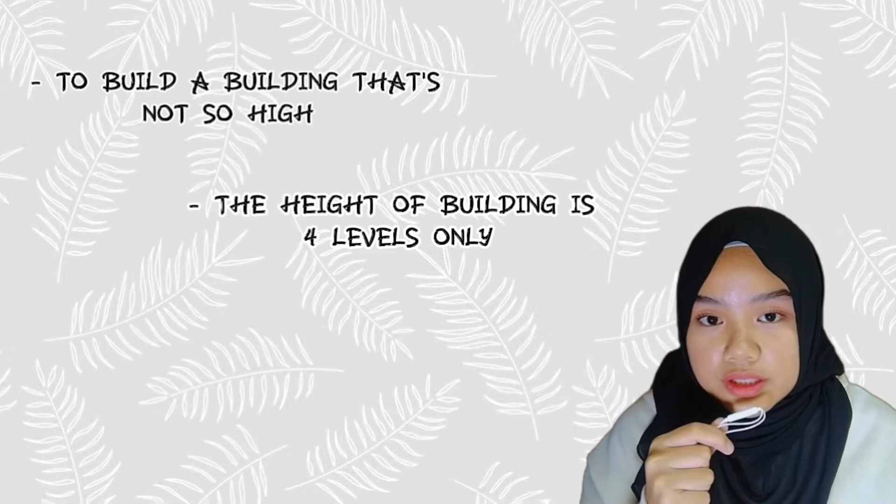Next, we're going to talk about design proposal. For the construction of these quarters, we also planned to build a building that is not so high. The height of the building to be built is only a maximum of 4 levels. The benefit of building these 4 levels is that it can prevent it from falling easily during an earthquake.

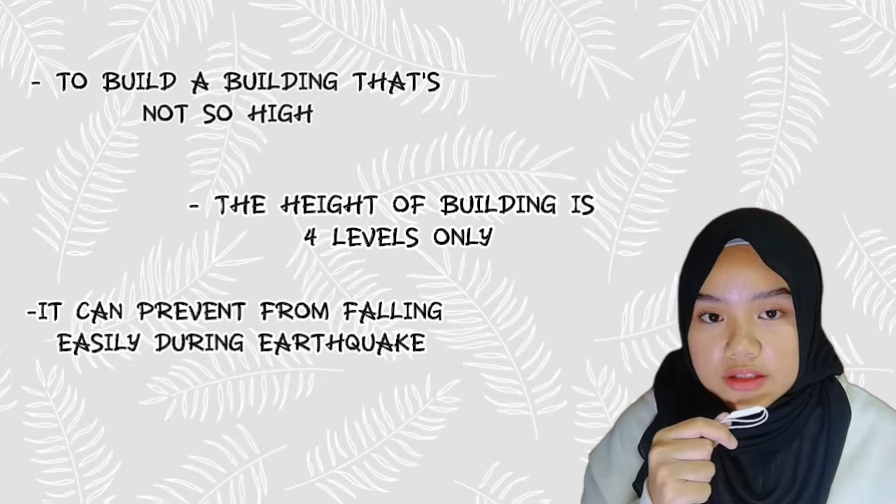These quarters have 3 parts of stairs, namely left, right, and middle. This will make it easier for a resident to go from one place to another place quickly.

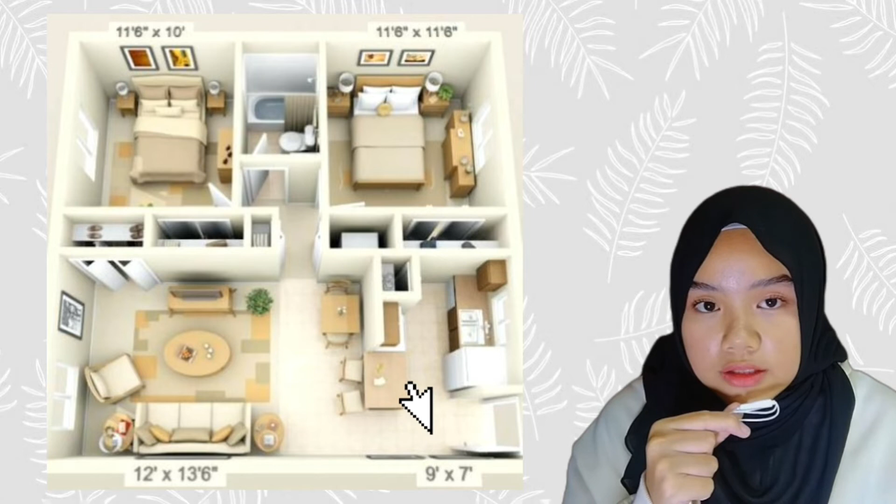For each house in these quarters, its area is 500 multiply 500. In detail, each house will have 2 rooms measuring 11 feet 6 inches multiplied by 10 feet, then a bedroom measuring 11 feet 6 inches multiply 11 feet 6 inches. For the living room, we plan a size of 12 feet multiply 13 feet 6 inches, and finally a kitchen measuring 9 feet multiply 7 feet. That is the size of a house in our quarters like the picture.

These quarters have 8 houses each level, meaning 8 multiply 4 equal to 32 houses for one building.

Our quarters use concrete tiles as the roof. This is because concrete tiles are more durable than other roofs. The structure of concrete tiles is also beautiful, and even though the cost of material and installation is higher, it is worth it to use because this material is durable.

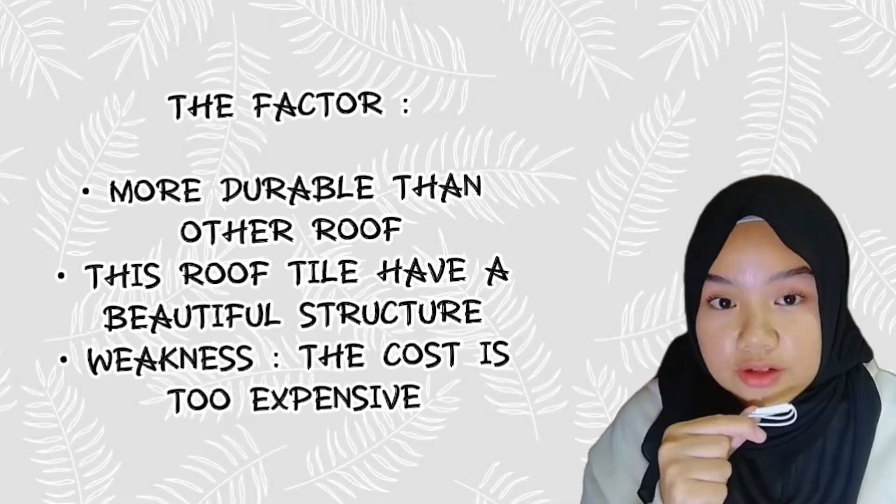Today I want to present about type of building material used and the pros and cons of such material. I, as a project engineer, choose a precast concrete method as the main material to build the polytechnic quarters housing project in Shah Alam, Selangor. What is precast concrete?

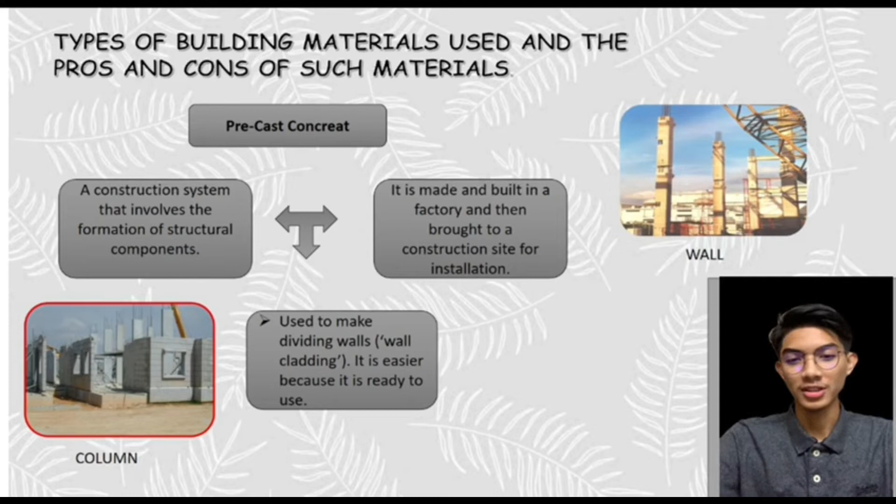Precast concrete is a system construction involving component structure. These components are made by the factory using reference determined. After concrete has been ready and has been tested for resistance at the factory, the goods will be brought using the truck to the project place. Example: precast concrete wall of quarters, stairs, and much more.

After that, in construction we have many methods to use. I choose precast concrete. Precast concrete also has advantages and disadvantages.

First advantage is less labor consumption due to the simple installation method. The second is repeat design will reduce the cost of expense. Third, using only one mold for the same size is able to reduce waste at the construction site because there is less formwork, the work of mixing, placement is reduced.

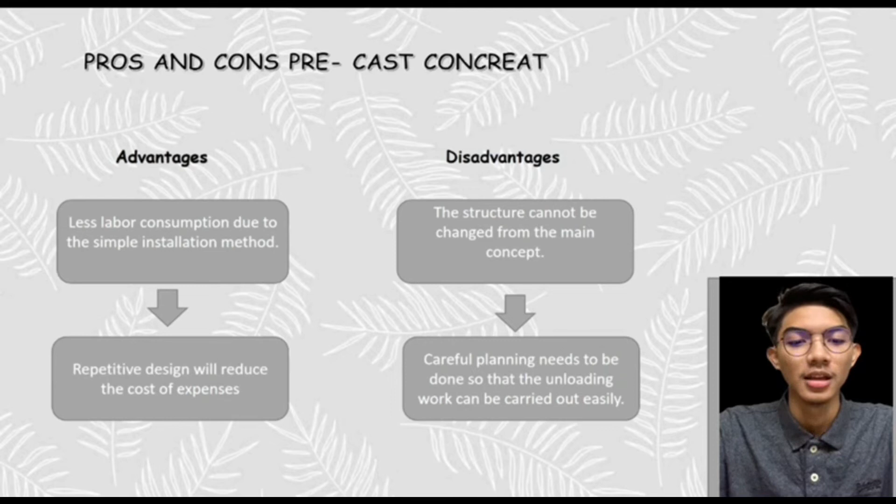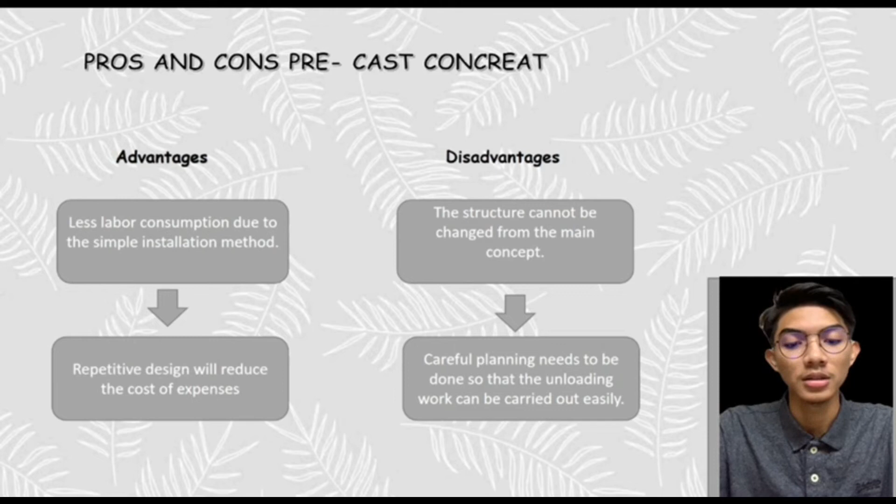Okay, next is disadvantages. The structure cannot be changed from the main concept. Careful planning needs to be done so that the unloading work can be carried out easily. Home renovation in the future is difficult. Each unit requires meticulous protection, whether during acquisition or at the construction site. In the process of connecting the structure, problems will arise such as water entering, weather, and other issues.

Okay, the next material is the roof. I choose concrete tile. Concrete tiles are made of color-matched concrete, unlike traditional roofing tile made of clay. The concrete roof system offers durability, aesthetic appeal, and low maintenance.

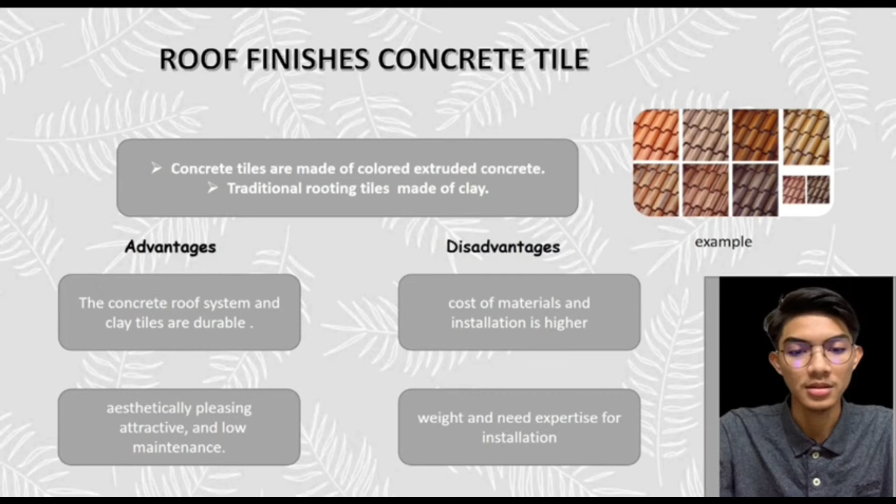They also provide energy saving and are environmentally friendly. Thus, the cost of material and installation is higher for concrete and clay tile roofs. When evaluated based on price versus performance, it can outperform other roof materials. Tile has adorned the roofs of much of history, building as well as modern structures, which because of the extreme durability, longevity, and safety, roof tile are the most common roofing material in the world.

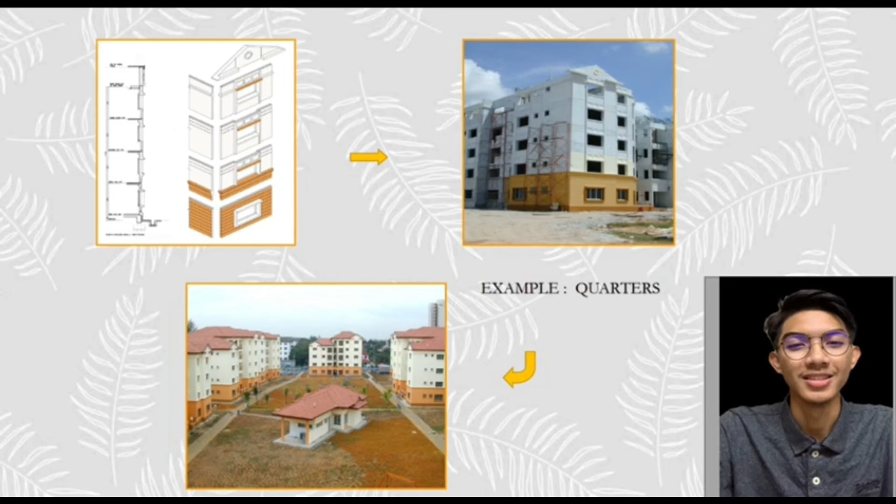That's all for me. Thank you.